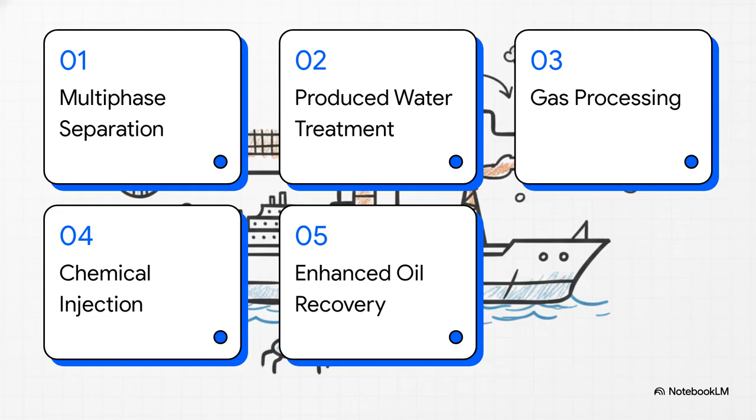To untangle all this chaos, we're going to follow a single drop of fluid through 5 main stages: separating the multi-phase mixture, treating the produced water, processing and compressing the gas, injecting crucial chemicals, and finally, looking at enhanced oil recovery techniques. First up on our journey, Section 1, separating the multi-phase mixture. This is where we begin the heavy lifting of detangling and stabilizing that raw fluid.

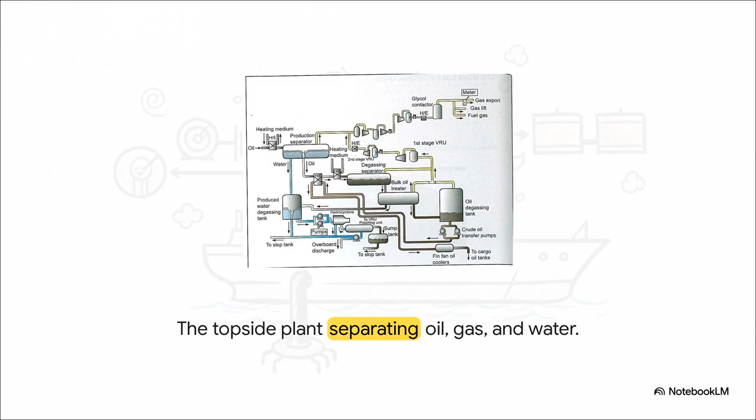The moment this multi-phased fluid arrives on the deck of the FPSO from the subsea wells, it's immediately routed right into the production separator train. Think of the topside process plant as this massive, incredibly intricate web. Its entire job is to systematically untangle the oil, gas, and water into safe, manageable, export-quality streams.

The core of this detangling actually happens across a progressive 3-stage separation train. We start at the high-pressure separator, which operates at a whopping 60 to 80 bar. Then, the partially degassed fluid moves to medium pressure, and finally, the low-pressure stage. Think of it exactly like slowly unscrewing the cap on a shaken bottle of warm soda.

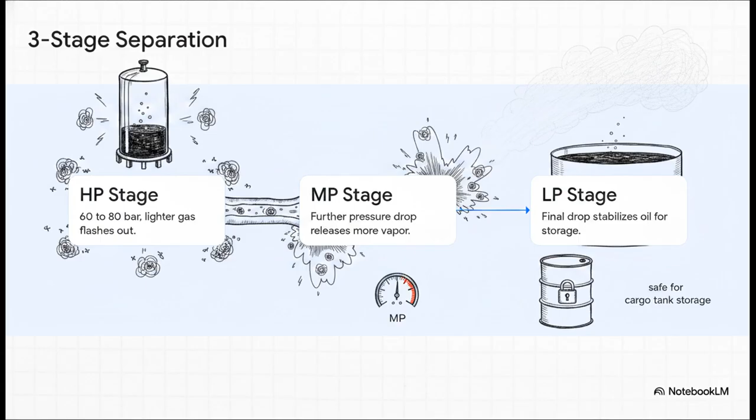As the pressure drops at each successive stage, the lighter hydrocarbon gas components naturally flash out of the liquid crude as vapor. By progressively stepping the pressure down like this, the vapor pressure of the oil itself is reduced until it's fully stabilized and perfectly safe for cargo tank storage.

Inside one of these massive separator vessels, it's really just simple fluid dynamics taking over. The gas flashes upward and passes through a mist extractor to catch any stray liquid drops. Meanwhile, gravity is doing all the hard work down below. Because oil and water have different specific gravities, the oil naturally forms a middle layer right on top of the water.

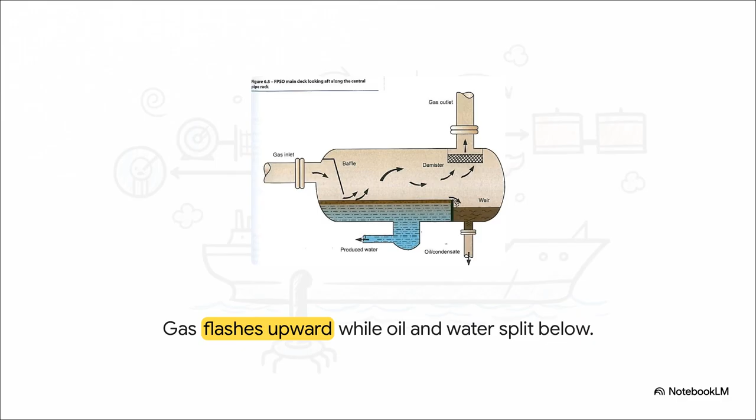Physical baffles and a really clever weir system, which basically acts like a tiny dam, allow the lighter oil to spill over into a separate chamber. It's brilliantly simple, completely isolating the 3 phases. But wait, even after those 3 big pressure drops, the oil isn't perfectly pure just yet. It still holds this really stubborn emulsion of microscopic water droplets.

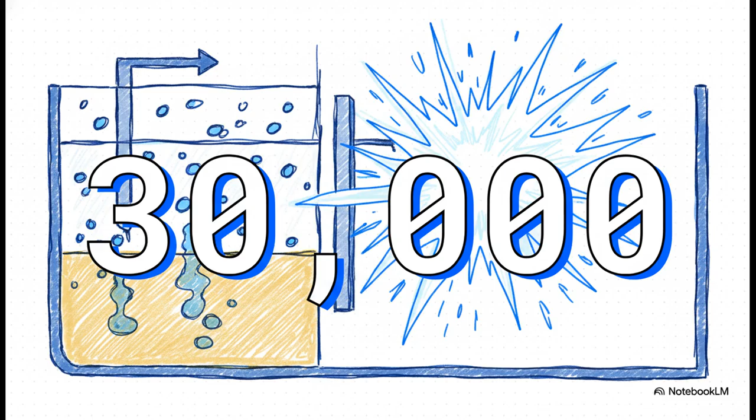To fix this, the separated oil is passed through an electrostatic coalescer, and this thing is wild. It literally blasts the oil-water emulsion with 10,000 to 30,000 volts of electricity. This intense electric field polarizes the suspended water droplets, forcing them to collide, merge into larger drops, and then just sink to the bottom by gravity. It is highly effective, bringing the final export oil down to a strict BS&W, that's basic sediment and water, specification of less than 0.1 to 0.5%.

All right, moving right along to Section 2, treating the produced water. Now we have to deal with the water we just stripped out of the crude. This produced water is highly toxic. It's full of dissolved gas, dispersed oil droplets, production chemicals, and sometimes even naturally occurring radioactive material. So we absolutely cannot just discharge it directly into the ocean. It has to run through a dedicated step-by-step treatment train.

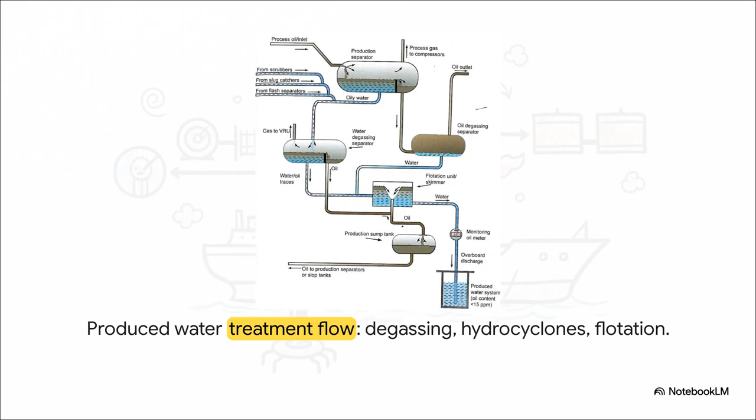First up, it goes into a degassing tank at near atmospheric pressure just to release any dissolved gases. Then the water moves into hydrocyclones for fine separation. And finally, it enters a flotation unit to skim off the very last traces of oil. Now, what's really fascinating about a hydrocyclone separator is that it actually has absolutely no moving parts.

None. The water is forced tangentially into a tapered tube, and this creates a violent, spinning vortex. Centrifugal force physically throws the denser water out to the outer walls and down to a bottom outlet, while the lighter oil droplets get forced into the center core and pushed out the top. This clever mechanical spin separates oil droplets down to an incredibly microscopic 15 microns.

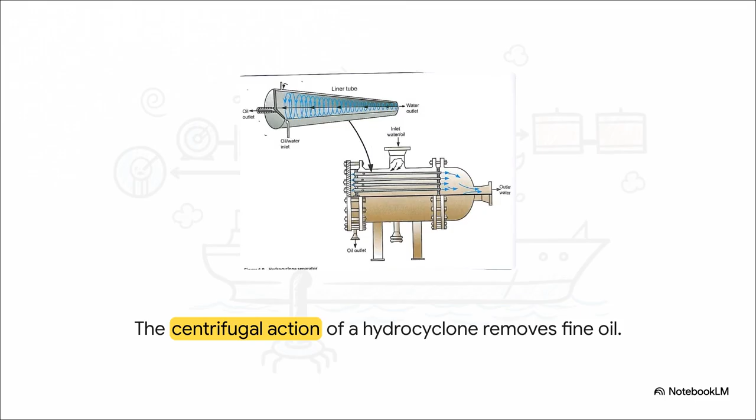And that level of precision brings us to a critical regulatory number, 15. After the water passes through that final flotation stage, an online meter continuously measures it. The absolute strict limit is an oil concentration below 15 parts per million before discharge.

If it spikes even a little bit above this limit, the system automatically recycles the water right back through the treatment train. This is exactly how the facility actively protects the fragile marine environment from any contamination.

Which brings us to Section 3, gas processing and compression. This is the lightest phase of our fluid, but handling it requires some incredibly intense engineering. Dealing with gas at these pressures introduces some incredibly high stakes. Gas from each separator stage is first scrubbed to remove entrained liquid. Why? Because if even a tiny, microscopic amount of liquid makes it into a centrifugal compressor impeller spinning at high speed, it causes catastrophic erosion.

But an even bigger threat is compressor surge. This is a terrifying phenomenon where flow suddenly reverses back through the compressor. The violent vibrations will physically destroy a multi-million-dollar machine in a matter of seconds. It's a constant balancing act. But once safely compressed, this gas is incredibly valuable. It's used as fuel gas to power the turbine generators on the FPSO, completely replacing diesel, or it's re-injected into the reservoir to maintain pressure, exported via pipeline, or, as a very last resort, flared off.

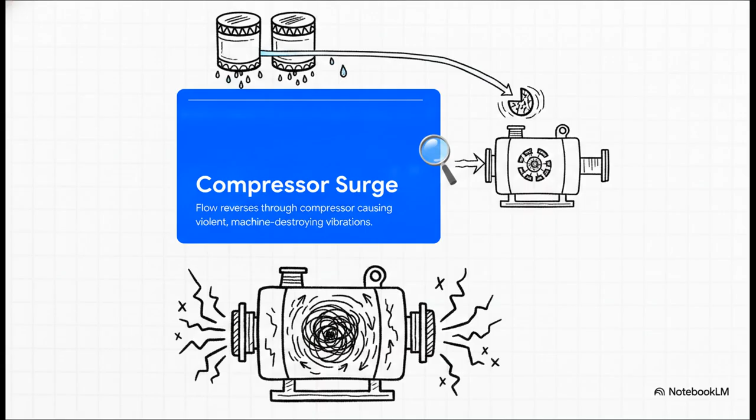But before any of that high-pressure compression can happen, the gas must be perfectly primed, meaning it has to be dehydrated and sweetened. Wet gas is forced up through a contactor tower against a downward cascading flow of triethylene glycol, or TEG. Think of TEG like liquid blotting paper. It absorbs the water vapor by hygroscopic action. This water-laden TEG is then heated in a reboiler regenerator to boil off the water and recirculated right back into the tower in a continuous loop.

On top of that, if the gas is sour, meaning it contains dangerous hydrogen sulfide or carbon dioxide, a process like Selexol is used to dissolve and strip away those hazardous acid gases.

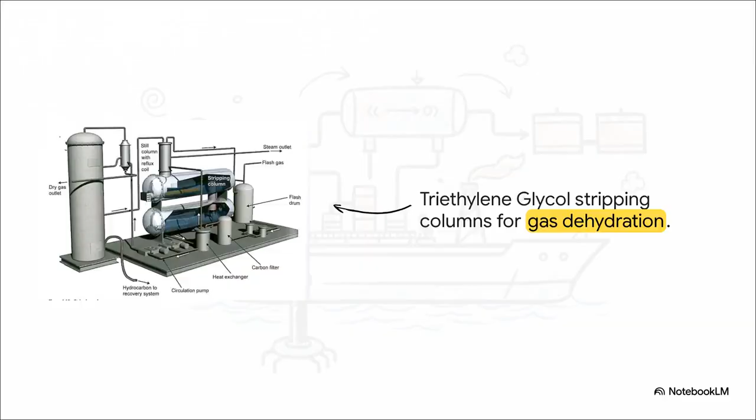All right, let's look at Section 4, crucial chemical injection systems. Now we're shifting our focus to the unseen chemical battles being waged constantly within the thousands of feet of pipework. You see, down in the freezing depths of the ocean, gas and water can combine to form these nasty ice-like plugs called hydrates, which can catastrophically block a flow line or riser. To fight this, engineers inject chemicals directly into the subsea piping.

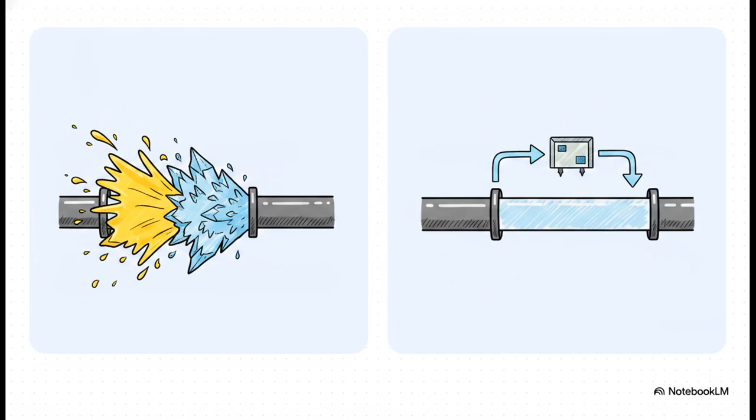Methanol is highly effective and used in large volumes for emergency treatments to melt blockages. However, for continuous, day-to-day hydrate prevention, monoethylene glycol, or MEG, is the preferred choice. Why? Well, because MEG can actually be recovered on the FPSO, heated, regenerated, and pumped right back down, making it way more economical. And hydrates aren't the only enemy down there. Every massive operational threat has a specific chemical counterattack.

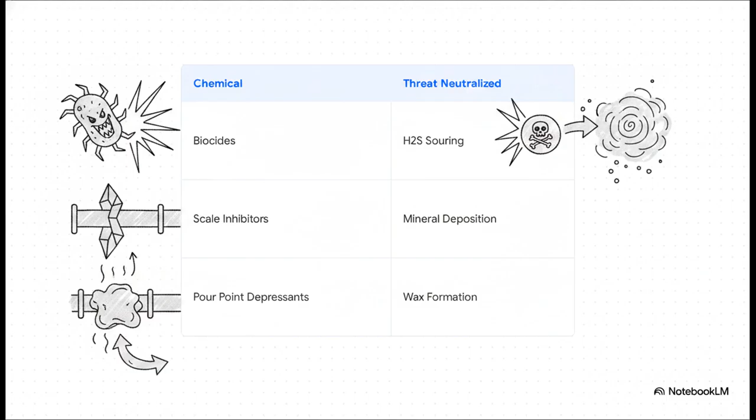For example, if sulfate-reducing bacteria are left unchecked, they produce highly toxic H2S gas as a metabolic byproduct, completely turning the reservoir sour. To prevent that, we continuously inject biocides. When seawater mixes with reservoir water, hard minerals can crystallize and literally choke the pipes, so we pump in scale inhibitors. And to stop the crude oil from cooling and solidifying into a thick wax, pour-point depressants are dosed right into the flow. It's an absolutely relentless, precise chemical war going on 24/7.

Finally, that brings us to Section 5, Enhanced Oil Recovery Techniques, or EOR. As a reservoir matures, its natural pressure steadily declines. The FPSO can't just sit there and wait for the oil to stop flowing. It has to actively fight back. When natural pressure isn't enough to push the fluid up thousands of feet to the surface, we deploy some powerful mechanical and thermodynamic solutions.

We use gas lift, which is actually the simplest and most widely deployed EOR method on FPSOs, where we inject high-pressure gas down the well annulus through downhole valves to aerate and lighten the fluid column. We use electric submersible pumps, basically lowering physical motors down into the corrosive reservoir fluid to push the liquid up. And of course, we use water injection to maintain the reservoir pressure itself.

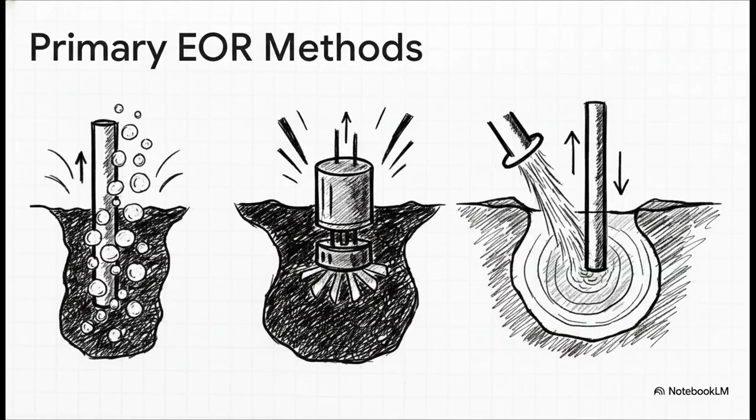Water injection is an incredibly reliable EOR method. By taking treated seawater, or even recycled produced water, and injecting it into the outer flanks of the reservoir at an immense 400 bar of pressure, it creates an artificial drive. It's literally a massive wall of pressurized water that sweeps the remaining, stubborn pockets of oil directly toward the producing wellbore.

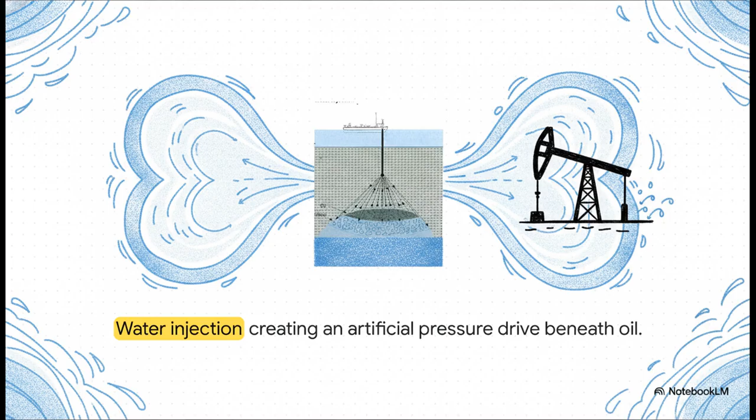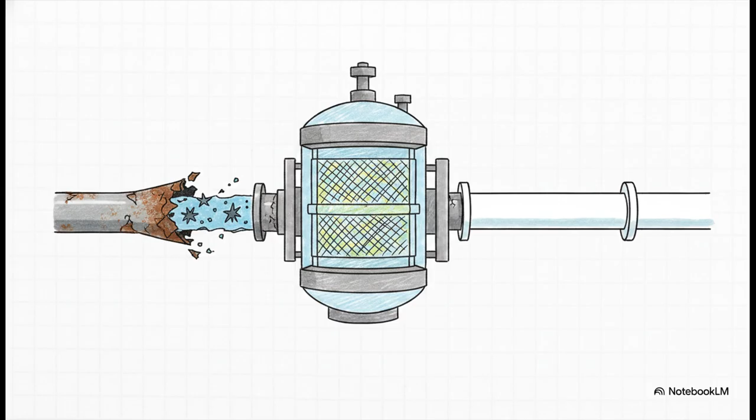But here's the catch. You can't just pump raw seawater into a multi-million-dollar well. Seawater is packed with dissolved oxygen, which would instantly rust and corrode the downhole steel tubing. Enter the Minox system. This extreme filtration process uses nitrogen stripping and a methanol-palladium catalyst to chemically scavenge and remove oxygen from the injection water, and it brings it down to an astonishing 10 parts per billion. That's billion with a B. It stops oxygen-induced well corrosion dead in its tracks.

So, to quickly recap Module 6, we've seen how three-stage separation progressively degasses and stabilizes crude, how electrostatic coalescers remove emulsified water, and how water treatment hits that strict 15 ppm standard. We covered the chemical warfare keeping pipes clear, the TEG and Selexol gas processing, and the massive EOR methods pushing field life way beyond natural flow.

But it leaves you wondering, as subsea pressures inevitably continue to drop, just how far into the future can the engineering on these floating titans extend the life of a dying well before physics finally wins? It's a fascinating, ongoing battle of innovation. All right, Module 6 was a big one.